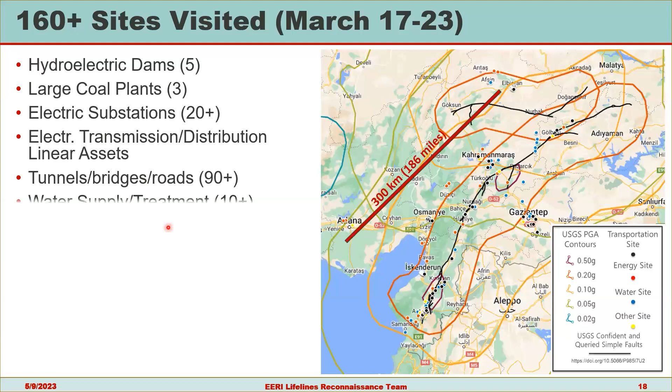We reviewed more than 160 sites, which included hydroelectric dams, coal plants, substations, transmission and distribution assets, tunnels, bridges and roads, water and wastewater treatment plants, airports, universities, LPG terminals, industrial plants, and other gas and energy sites. So a very wide range, a very diversified portfolio, and we're still processing the data. Today, due to lack of time, we're just going to focus on a subset of those. I hope you'll find the rest of the presentation enjoyable.

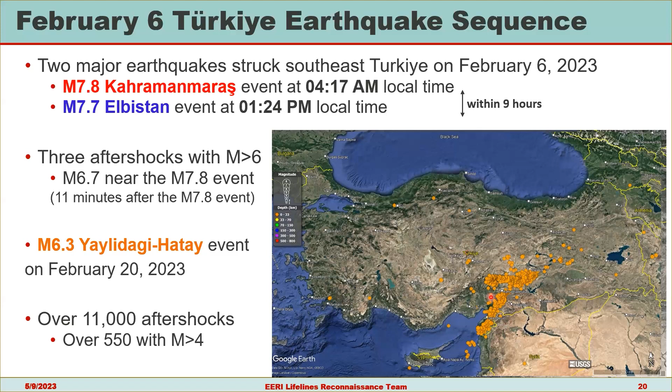As both Ricardo and Eduardo said, there were so many aftershocks that happened over there. It was a very instrumented region. There were over 11,000 aftershocks, and to this day, over 550 of them were greater than magnitude 4.

So just looking at the region, Turkey is a very earthquake-prone region. It is in between all these plates, and the earthquakes we are talking about today, magnitude 7.7 and 7.8, happened at the intersection of the Anatolian Block and the Arabian Plate.

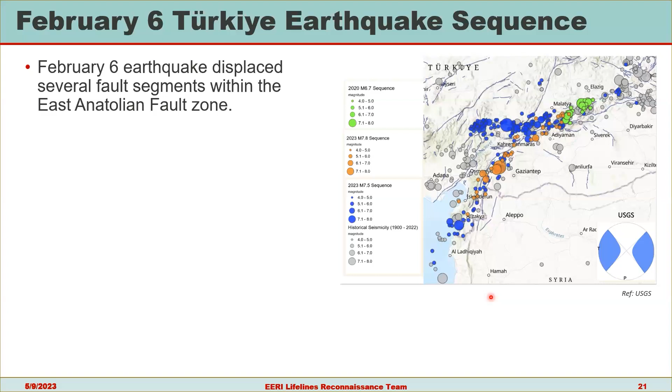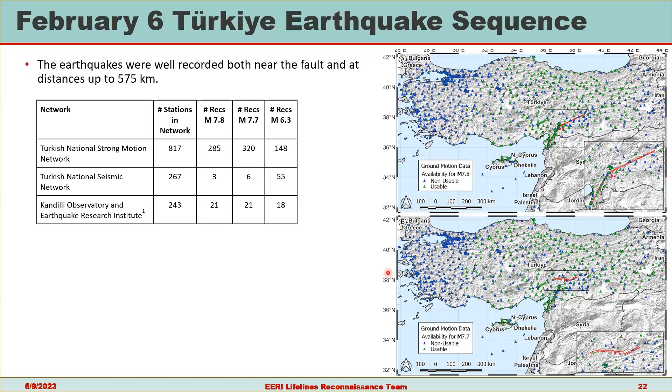I'm going a little fast, just for the time constraints.

If you look at the PGA contours along the area, you can see there were significant directivity issues, with Antakya and Hatay being among the most impacted regions, together with Islahiye and around there.

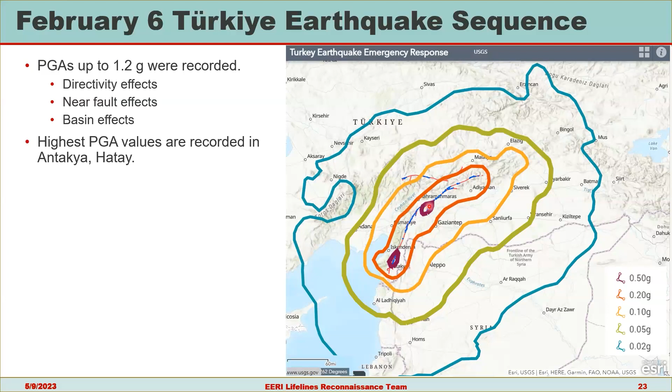So the overall region that was impacted covered 11 provinces in Turkey, corresponding to over 99,000 square kilometers, over 15 million population, over 35,000 buildings collapsing, and maybe over 17,000 buildings requiring immediate demolition.

This was a very sad event, which ended up being over 53,000 people losing their lives. We feel extremely sorry for this and extend our condolences, and hopefully we will learn from these effects. As a result, 2 million people were displaced, and the World Bank estimates the cost at 34.2 billion in physical damages.

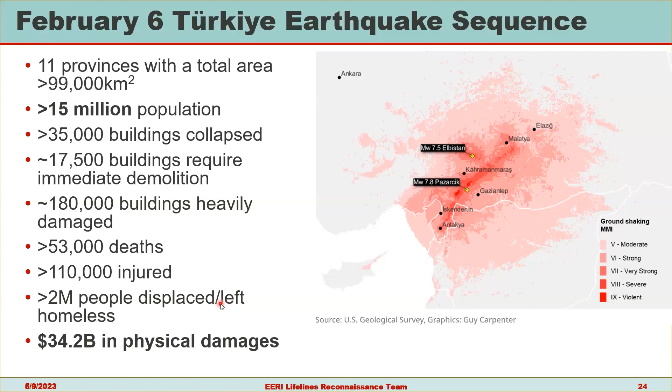The emergency response during the earthquake was a significant issue. Turkey actually has a robust national disaster action plan that was developed in 2014 by AFAD, the Disaster and Emergency Management Authority. Immediately after the earthquake, the level of impact was identified as one needing international support in addition to local and national support.

In fact, a magnitude 7.8, 7.5 earthquake was expected in the region, and a drill was conducted 3 years ago. But the one thing we missed was that it was not expected that all of the area would be impacted significantly from these events.

There was help that came from all around the country, with metropolitan municipalities sending support to the region. But some things went wrong, and I'll cover them quickly in the interest of time before passing it to Brent. There were accessibility problems that hindered transferring support and rescue groups to the impacted parts of Turkey, and necessary equipment was not able to get there, due to damages in the transportation lifelines, which we'll cover some of.

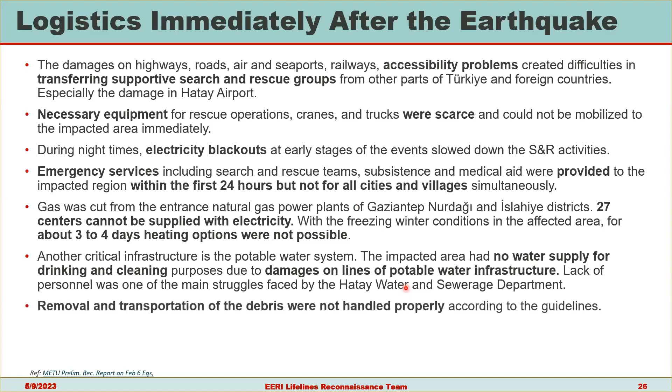With that, I'm going to switch control to Brent to take us through the transportation infrastructure. For the transportation lifelines, we visited a series of bridges and viaducts, which we'll refer to as bridges from this point. We also looked at tunnels, roadways, and airports.

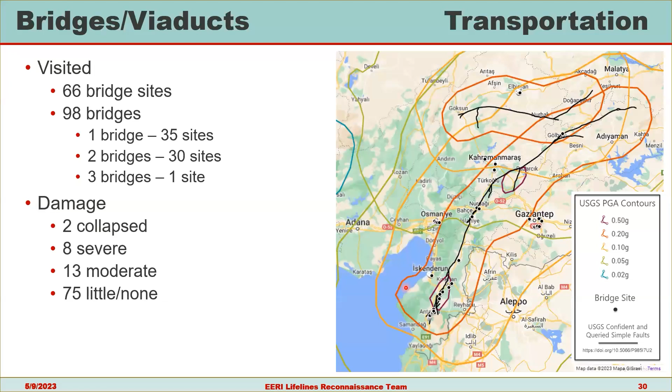In total, we visited 66 different bridge sites, containing 98 bridges total, since some sites had multiple bridges. Of the bridges we looked at, 2 had collapsed, 8 were severely damaged, 13 had moderate levels of damage, and 75 had little to no damage. The locations of those bridges are shown with the black dots on the map on the right.

Common issues with these bridges included incomplete load paths from the bridge deck to the supports at the end of bridge girders. Those incomplete load paths included no end diaphragms between girders at the supports, and undersized or insufficient numbers of shear keys between girders at the supports. We also observed longitudinal movement of some bridges, resulting in walking out or displacement of the thick elastomeric bearing pads at the supports.

We observed a number of geotechnical issues, including abutment settlements, embankment failures, and lateral spreading at abutments, as well as leaning and residual drift of bridge piers and abutments, both in the longitudinal and transverse directions.

To give you some examples of what that looked like, we'll quickly go through a series of 4 different bridges we observed. The first is the Bekir-Karabacak Bridge site, which includes a pair of bridges and is an important river crossing in Antakya. When we visited on March 17th, only one bridge of the pair was open, and it was being used heavily by heavy trucks to take debris from Antakya to a dump site on the eastern side of the city.

At the bottom of the slide, we've included some estimated PGA and PGV values at the site. Those values were provided to us by Jonathan Stewart's research group at UCLA, and they are the RotD50 values. At some point in the future, we will also consider directionality of ground motions at each site.

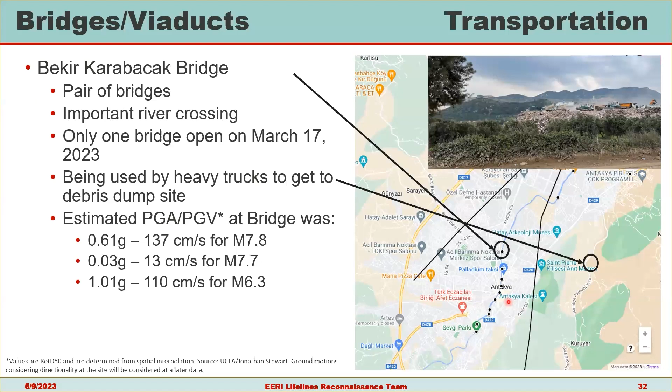Next bridge we want to mention is the Hatay Stadium Bridge. This site also has a pair of bridges. The road serves a hospital immediately adjacent to that area. The bridge itself is immediately adjacent to the fault, and this bridge was closed when we visited on March 18th. Some workers doing activity near the bridge said that the bridge would be demolished.

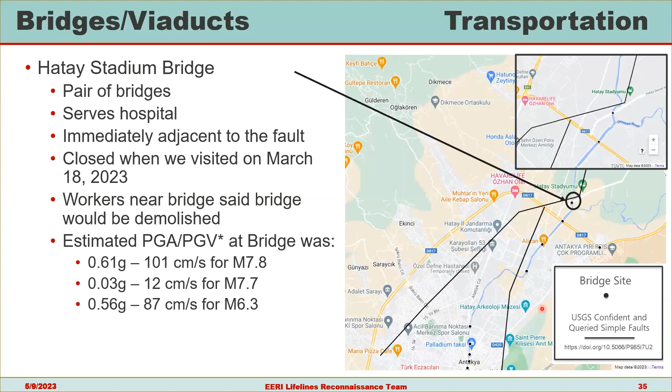You can see the box here trying to show that we do not have the end diaphragm to complete that load path there, and you can see the large longitudinal cracks down the web of the girder.

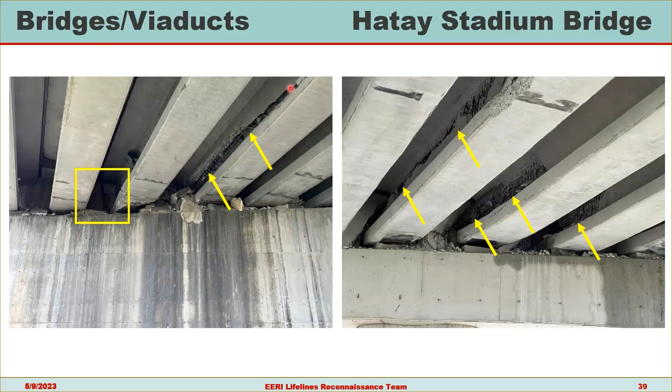Additionally, once again, as we mentioned, the shear keys, both at the ends of the pier caps and even more towards the middle, seem to be undersized or insufficient for the demand placed on them. This particular bridge had so much longitudinal movement that there was significant displacement of the rubber bearing pads, or elastomeric bearing pads, so much so that a number of those pads were ejected from the bridge, and we found them adjacent to the piers of the bridge.

This is an image of the set of piers from that bridge. There's a lot going on here, so we'll try to quickly take you through it. Just some cultural things - this is just north of the city of Antakya, but Antakya is immediately adjacent to an agricultural area, and so just an interesting side note, there were herds of sheep coming through as we were trying to assess the bridge. The piers themselves, there's quite a bit of damage here.

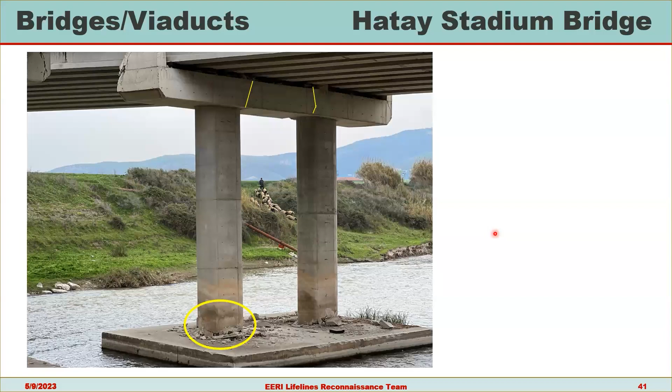Up at the top at the pier cap, there was cracking of that cap. There were plastic hinges at the base of the piers. There's an ejected bearing pad, and the shear keys are damaged both at the ends and at the middle.

The third bridge of the 4 is the Karasu Çayı Bridge. It's a single bridge, near fault, serves a small agricultural area, but the loss of this bridge increases the drive time from each adjacent side by about 30 to 40 minutes. It was open to traffic when we visited.

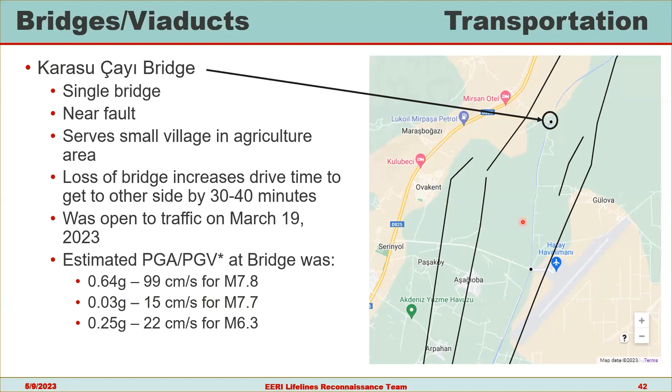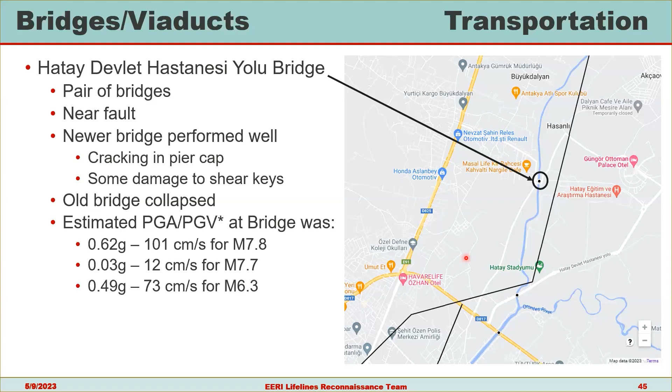This bridge, the Hatay Devlet Bridge, was a pair of bridges, once again, near a fault. What was interesting was that there was a newer bridge on site and an older bridge. The newer bridge performed quite well, with a little cracking in the pier cap and some damage to shear keys, but the old bridge on this site collapsed. This is what that looks like.

I want to talk briefly about tunnels. We had heard before we went to Turkey that tunnels had performed pretty well, with the exception of one that had to be at least partially closed. So we wanted to see that one.

That particular tunnel is the Erkenek tunnel. It's on the D850 highway. It's a 2-bore tunnel, with 2 lanes of traffic per bore, and it connects Malatya, the city in the upper right on the map, with Kahramanmaraş and Gaziantep, the 2 cities on the lower left of the map.

This tunnel is close to, but not on, a fault. We had heard that it was closed, or at least one bore was closed. However, when we were there on March 20th, both bores were open. We did observe that the tunnel liner and casing were both damaged.

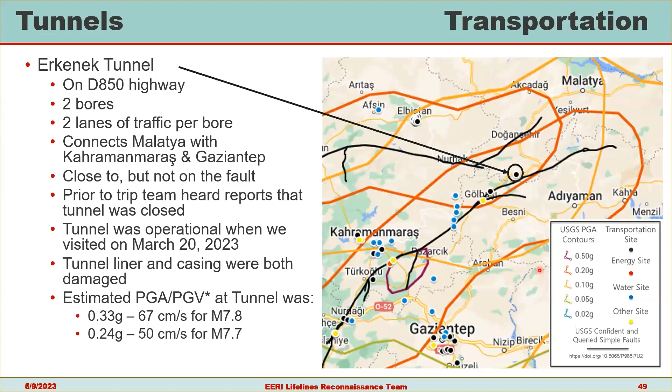For roadways, we primarily observed these while traveling to other sites, and they generally performed quite well. The common issues we saw with roadways were primarily geotechnical, including surface fault rupture, embankment failures, and lateral spreading. But some roads were blocked due to heavy building damage.

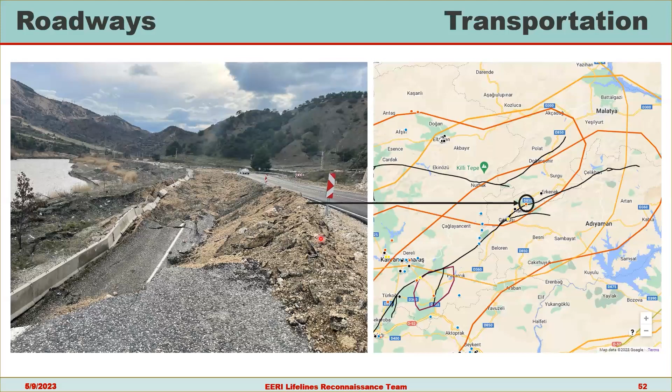This particular one is close to the Erkenek tunnel. It's along the river and had a large embankment failure. They actually repaved the road across the lumpy ground as a temporary measure to get the road back open to traffic, but that road will require significant further repairs in the future.

We visited 2 airports and got reports from a 3rd airport. We visited the Maraş airport and the Antep airport, and got reports from Hatay.

For the Maraş airport, it was constructed in 2019. After the earthquake, it was non-operational for about 2 days, without external power for about 20 days, but operated on backup generators. There was some cracking in finishes and non-structural damage. While we were there, we did observe some slip in some of the bolted connections of the steel structure.

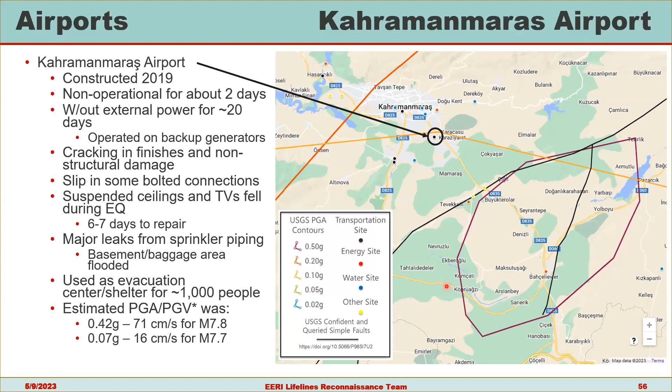We had reports that the suspended ceilings and TVs fell down during the earthquake, which took about 6 or 7 days to repair, and that there were major leaks from burst sprinkler piping, which unfortunately flooded the baggage area in the basement. This particular airport was used as an evacuation center and shelter for about 1,000 people in the days right after the earthquake. Just a couple of images of what that looked like when we were there.

Gaziantep Airport, we visited the new terminal, which was constructed around 2021. It's actually so new that there's still handover ongoing from the construction company to the operator of the airport. We understand that terminal was designed using the most recent Turkish earthquake code.

That airport remained operational. Its baggage handling system was undamaged. We did observe some cracking in finishes and some small non-structural issues. There was a little bit of evidence of movement at expansion joints, but largely no issues there.

Just a few images of what some of that non-structural damage looked like. Some cracking around the perimeter of infill walls. On the right, evidence of a little bit of movement at an expansion joint and around sprinkler heads.

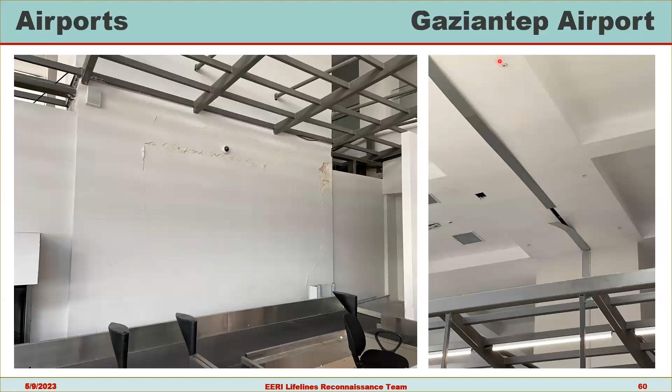The final airport was the Hatay Airport. We did not visit this airport. We had some contacts in Turkey who relayed some information and shared some pictures with us from this airport.

This particular airport, the runway buckled. The airport's immediately adjacent to the fault. The fault really runs through the corner of the airport property.

That runway was quickly repaired. There was no major damage to the terminal building. However, an entrance canopy at the front of the terminal collapsed. This was attributed primarily due to a lack of a lateral structural system in one direction. But unfortunately, some settlement adjacent to the terminal impacted some of the mechanical, electrical, and plumbing infrastructure.

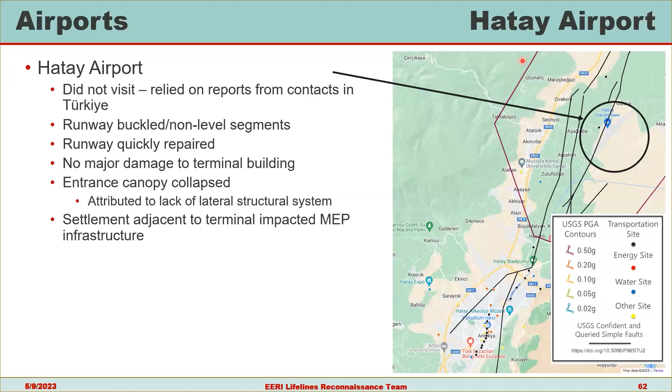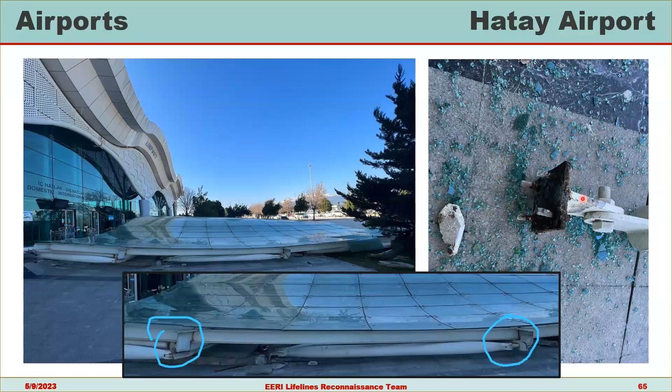I want to briefly touch on the universities and what we did there. We visited 3 different universities: Kahramanmaraş Sütçü Imam University, or KSU, Gaziantep University, and Mustafa Kemal University in Antakya.

The KSU campus, pardon me, go back one. Not able to control. Okay, there we go.

So the KSU campus was operational after the earthquake. The entire university campus had been converted to emergency housing and shelter when we were visiting in March.

In particular, we visited the engineering buildings, which had been constructed around 2008 to 2010. These particular buildings performed quite well, and there was very little cracking, even of finishes, in those buildings. We also visited the physical plant and observed no damage there, even to unanchored equipment.

I visited a hospital and clinic associated with that university. We did observe some limited damage at that hospital, including cracking at the interface of infill walls and structure, some tile damage near expansion joints, some cracked glazing and automatic doors, and failure of a small roof structure. For the sake of time, we're not going to show those photos.

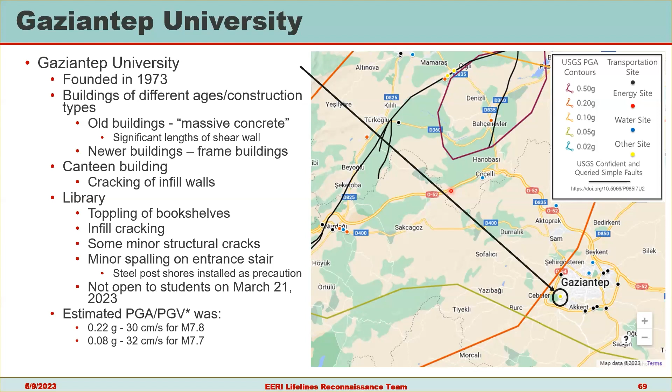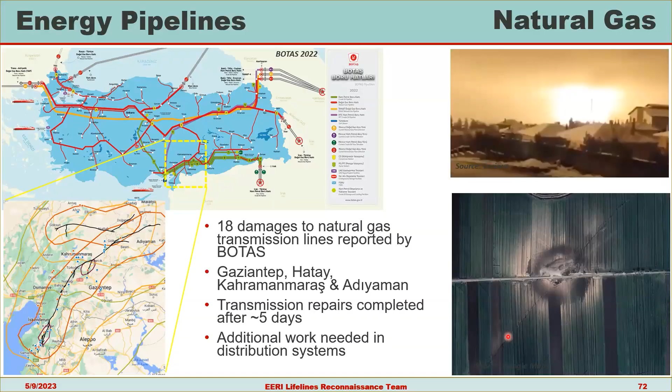We weren't able to work with or contact, despite trying, government officials on these, but I think there's a lot of really important things to understand about successes and also failures of some of the various gas infrastructure, and lessons we can learn from around the world, as I think many of these systems are really relevant to the rest of us in earthquake-prone areas. We hope to learn more as we continue forward and more information becomes available.

I'll kick off the water section a bit by talking about the first two water utilities, and then pass it off to Solchek and Robert. The Kahramanmaraş Water and Sewerage Administration is the namesake of the earthquake and manages the northern area. It was incorporated in 2016 and serves about 1.2 million people.

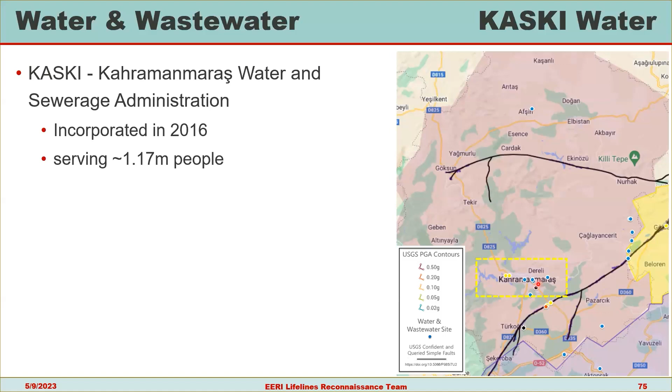Relatively recently, a number of these province-level water utilities were developed to bring all these different towns under one common management group. That has helped in some ways in us being able to get information from these areas, but it's also provided different types of challenges, since systems within one of these groups can be very different from town to town or city to city based on how they've developed over time. So there's a lot of variety in the characteristics of each of the systems.

Going north, the two large water sources are relatively recent, which we saw as a trend in construction of infrastructure systems over the last 20 years in Turkey, built to support increasing populations and help fuel economic growth. A lot of the systems built recently performed generally well, and I think are really good surrogates for other places around the world.

A couple of additional details about the Kaski water system: about 3,200 kilometers of water distribution pipeline, 1,500 in wastewater, a number of different pipeline types that are relatively similar to what we'd have in cities in the US and around the world. And the new installations are also similar in the types of materials that we would expect used in a lot of other places.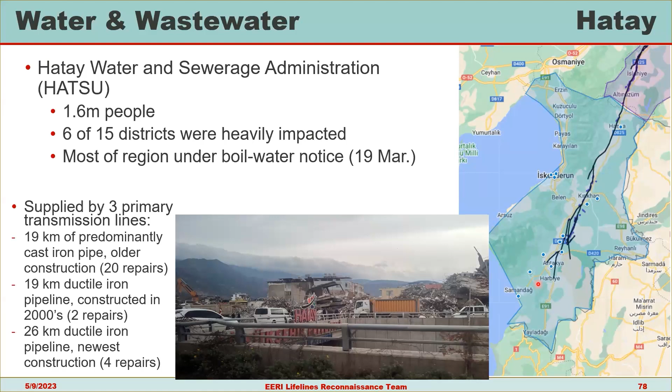There's a number of repairs that were done relatively rapidly following the event to get primary supply to a number of areas, and there's additional information on some of those there.

The town of Iskenderun is a little bit further from the fault rupture, but experienced some pretty significant liquefaction effects.

Whether it was inoperable due to acute damages in this area, or if it's more related to some of the wastewater treatment plant damages, which Robert's going to talk about in a little bit, that was unknown to us at the time. But these are some important observations as we continue identifying which pieces of the infrastructure systems are leading to their inability to get things back up and running.

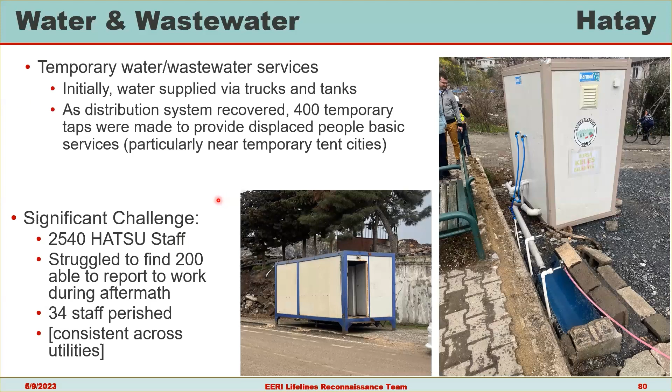The significant challenge reported to us by all of the utilities was staffing. For example, Hatsu had about 2,500 staff. In the days after the earthquake, they couldn't find 200 people to come. 34 of their staff had perished. Many people were looking for lost loved ones and keeping an eye on their property. Those are some of the really big personnel challenges that impacted the recovery and the ability of folks to move forward after this.

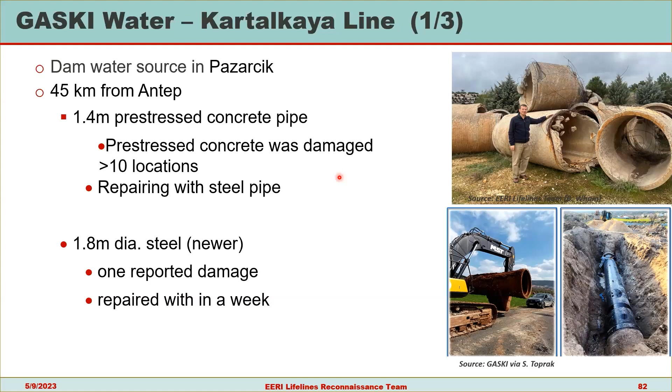But right after the earthquake, some people migrated away from the city, and there were also damages in the distribution lines, so the need for water was limited at that time. So Gaziantep Gaski were able to provide water to part of the city from the other sources. In this transmission pipeline, there were wall damages at 10 locations, structural damages, and fault ruptures, which I'm going to show in a moment. The pipeline goes into the mountain for about 3.5 kilometers. The diameter of the tunnel is about 5.6 meters, and the pipeline itself is 2.6 meters.

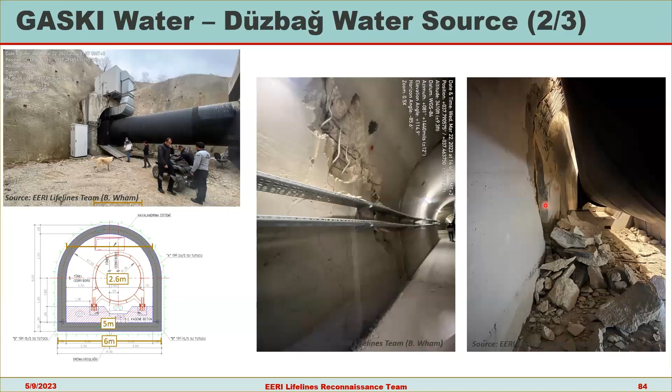You can see some of the damage here in the lining. We walked through the entire tunnel, 3.5 kilometers from one end to the other, and there were many lining damages throughout, some relatively heavier compared to other locations. At those locations we also noticed significant displacement in the tunnel.

As a result of those movements, you can see there were some residual offsets at the pipeline supports here, and there were some fixed support damages.

The pipeline was actually constructed quite well in many aspects. They have expansion joints with a capacity of 7 centimeters, and it was able to tolerate the movement itself — we haven't noticed a separation at any location. Eventually they started a repair shop, inserted a 30 centimeter pipe, and were able to push both sides back to their original location.

There was an unfortunate location here. You can see this is a gas pipeline about 1 meter in diameter, and this water pipeline, the GASKI-Düzbağ transmission pipeline, is crossing here. Because of requirements by the gas company, they were asked to cross that area almost perpendicular to the gas pipeline, so it's about 80 degrees here where they crossed.

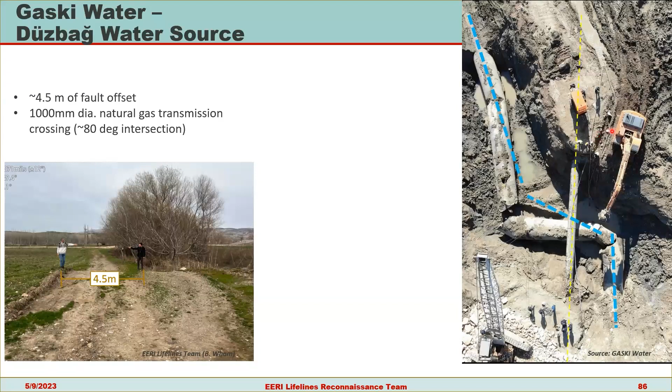You see here the outline, so this is the pipe. Right along this line we have the fault rupture, which is about 4.5 meters, especially in that area where we have a bend in the pipeline system. You see the extent of the damage — enormous energy was released here.

There were bends in the pipeline and wrinkles here, and you notice breaks and thinning in front of the pipelines. They were just stored them; maybe in the future they will use them for exhibition purposes.

The third main source is the Mizmilli water source. Here, as I mentioned previously, they were using wells to provide water, and they are 120 meters deep. There were 4 pump stations used here to pump water to the storage facility, and then the water is fed into the city by gravity. There are 42 kilometers of pipeline here, a 1.2 meter diameter steel pipeline.

You can see the structure before the damage here, and the pumps themselves — this is the pre-event building. After the earthquake, the pumps were fine; there was no damage to them and they were functioning well. But the structure itself got damaged.

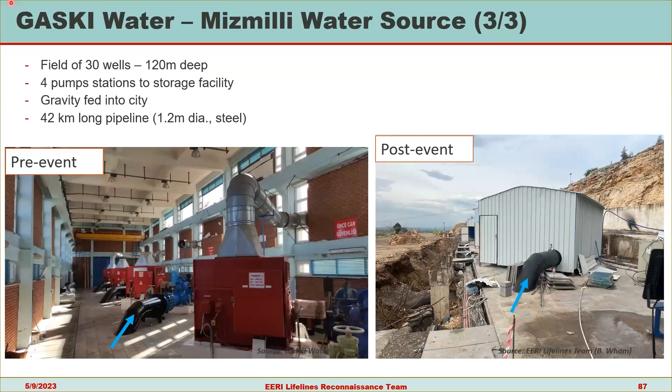Typical forms of damage — the construction was all quite similar, with inclined reinforced concrete columns and 4 to 5 ring beams along their height. The beams were quite stout, so most of the damage was concentrated at the columns. We did see some beam-column joint failures; in this instance, you see no confinement visible within the joint.

Another common issue was hinging just above beams, particularly up in the upper elevations of the tower where the plan dimensions narrow. You see here smooth reinforcing bars and a lap splice right within the hinge region—a fairly common form of damage.

This is potentially a newer tower in the Hatay region. Again, hinging just above the beam at some of the upper elevations. This is deformed, mechanically deformed reinforcing, with damage focused at the columns, which are slightly outboard of these very stout ring beams.

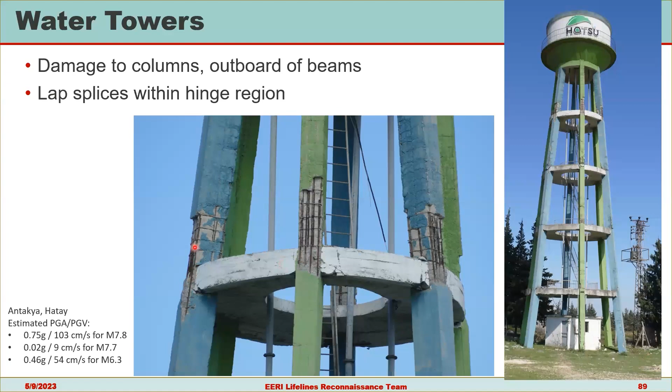In the Marash region, one of our teams had the opportunity to speak to the operators of the system. Similar forms of damage and similar construction of the tower, but because of the damage, they actually rerouted the system around this tower. Subsequently, customers reported fluctuations in pressure or even no pressure, presumably at higher peak demand times. Again, these are points of concern for adjacent communities given their height and fragility, as we saw.

Getting into water and wastewater treatment facilities, grouping these together, there are a lot of similarities in the hydraulic structures, and we had very good access throughout mostly the Hatay region. We visited 9 wastewater treatment plants, and had a good interview with Hatsu, one of the operators of that facility or network, which has 16 wastewater treatment plants in total for their system.

As an overview, they had 10 plants operational about 40 days past the earthquake, during our visit. 5 were still inoperable, and we'll focus on some of the reasons why. 1 was reported as destroyed, largely due to ground subsidence—they reported almost a meter, about 90 centimeters of subsidence at that facility.

3 water treatment plants were visited, and we'll discuss one of those. Generally, as a class, we'd describe their performance as damaged but still operational. Brad touched on some of those challenges.

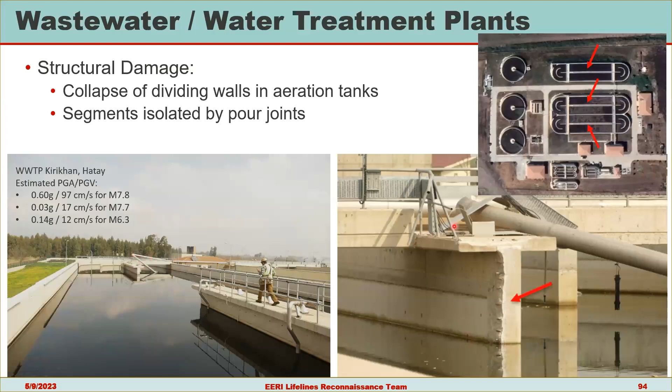Looking at a slightly different configuration, with a similar shape and dividing wall, this time there are opposing walkways at one side only, at opposite ends of the wall. The damage was really a pull-out of these walkways from the wall progressively, and as they became compression-only elements, this promoted a torsional response that damaged the dividing wall as it collapsed. You can see it partially collapsed here on the left photo.

Geotechnical aspects were a considerable factor, especially at the wastewater treatment plants. These tended to be situated for gravity flow at the low points or the middle of this large alluvial valley, often pretty close to the fault. We saw seismically induced settlements up to 25 centimeters. Generally, tank structures and hydraulic structures did reasonably well in terms of settlement, but even here, two closely spaced tanks had free field settlements measured at about 16 centimeters between them. So the demands on interconnecting below-ground piping and other infrastructure were considerable and led to some damage.

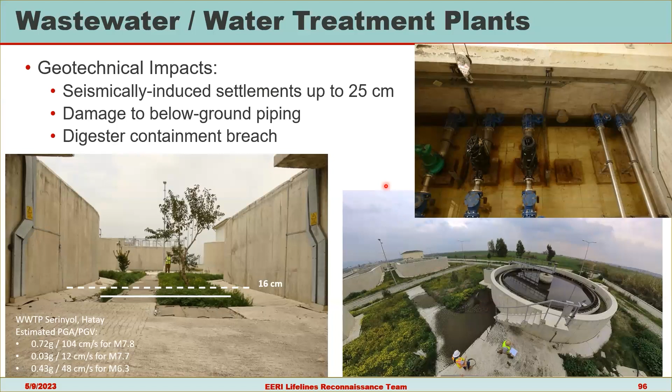In the upper right here, you see a basement pump area sitting in about 30 centimeters of water that's infiltrated. The operators believe that was from a number of below-ground pipe breaks that hadn't yet been investigated. Here, I believe this is a digester structure, but you see a containment breach, whether in the piping or in the structure itself, unclear. Again, meaningful impacts from pretty large settlement there.

Non-structural damage, again, this is one we see in many earthquakes, and I think many people probably anticipated it. Control panels, cabinets, equipment - we saw many things either unanchored or with anchorage that failed quite quickly. Often these were just righted post-earthquake and put back into position.

We'll focus on some of the larger components that really impacted post-earthquake operation. In this photo, you see a larger generator displaced in the east-west direction, in the photo background, about 30 centimeters. So you see several good things going for this generator, right? It had an integral fuel tank in its base. The electrical connection was fairly flexible. The exhaust connection to the building was also fairly flexible.

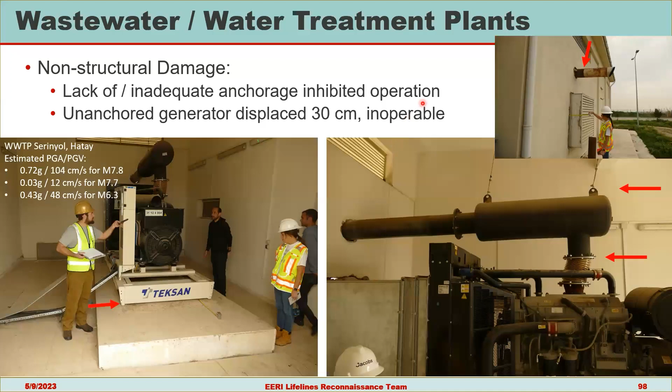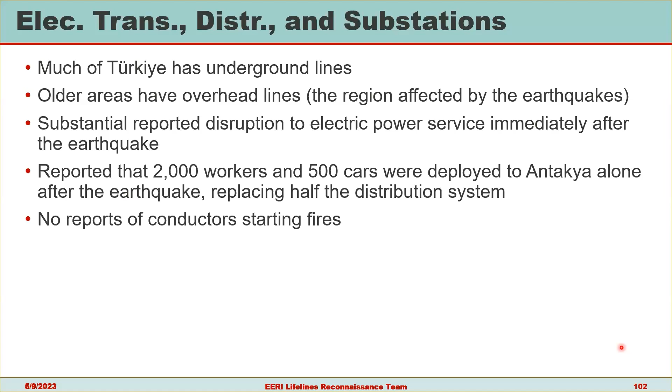Overall performance, transmission and distribution overhead structures generally performed well, but there were some exceptions. These were when there were geotechnical conditions that led to damage, if there were adjacent failures that impacted overhead structures, or in many cases, there were insufficient pole anchorage into the ground.

Outdoor substations would experience equipment damage, but this was relatively minor. Substation buildings, on the other hand, experienced both equipment damage and the collapse of the buildings, and these were substantially impacted by adjacent structural failures.

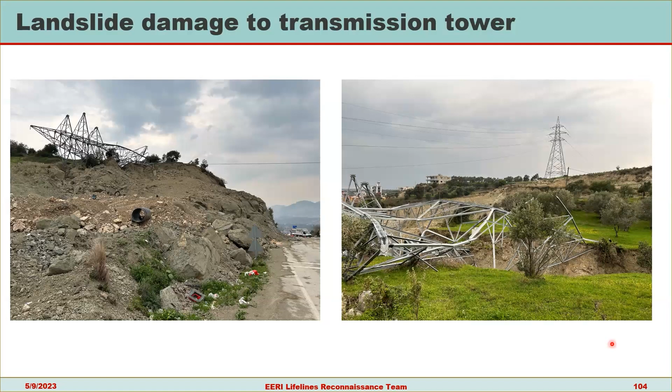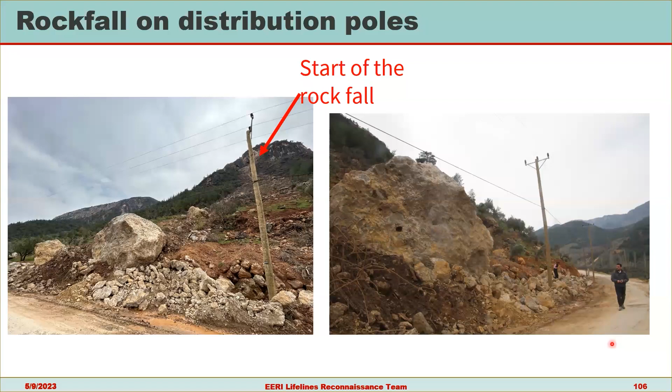This was not the only instance of geotechnical impacts. We also saw some instances of rock falls. In this case, the rock started all the way at the top of that hill and rolled all the way down and took out a number of distribution concrete poles that were then replaced by wood poles. This rock slide also blocked the road, so they weren't able to bring in cars to access it. They actually had to come in by helicopter to replace the poles.

You can see what one of those concrete poles looks like on the left-hand side when it's hit by these rocks coming from above. This wasn't just a local impact on one or two poles. This was all along this road there were impacts. On the right-hand side, we can see pole after pole, wood replacement poles that are in place.

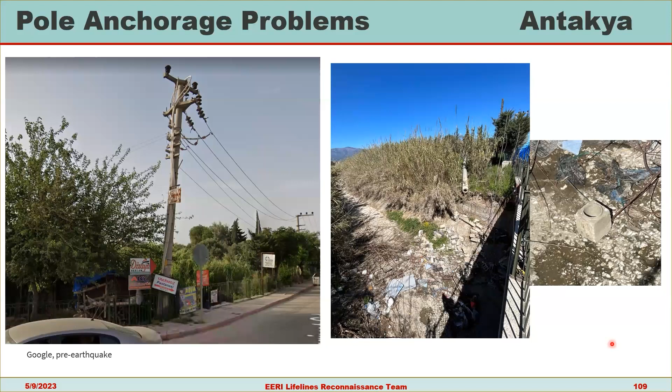Here's some more examples of rotating poles on the right-hand side. We see the after version of what's shown on the left-hand side, where I think this one got tugged by the conductor as well, and the pole fell off, and you can see what one of those pole foundations looked like in the photo on the far right. It just fell off the cliff here, right next to a bridge. If we look out in the field, away from the more densely populated areas, we see a number of poles and lines leaning from these similar types of pole anchorage problems.

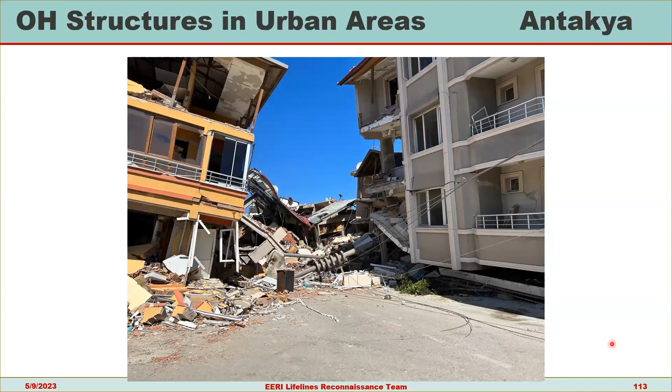In addition to debris hitting the structures, it could also land on the conductors, and then the conductors would pull on top of the poles and deform the pole. So this pole is leaning maybe 10 or 15 degrees because debris hit the conductors.

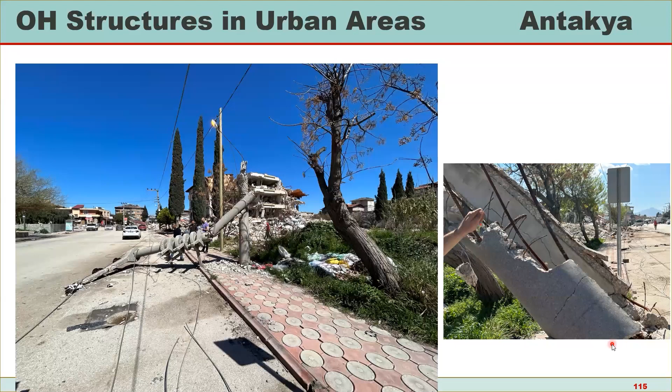In some cases, there were failures of concrete poles which may purely be attributed to inertial force issues. This typically occurred when there was some sort of deficiency. In this case, there were relatively smooth bars and very small stirrups that were lightly corroded, but because the stirrups are so small, they wouldn't spall enough concrete that you could notice there was a problem, and the stirrups fractured quite easily during the earthquake.

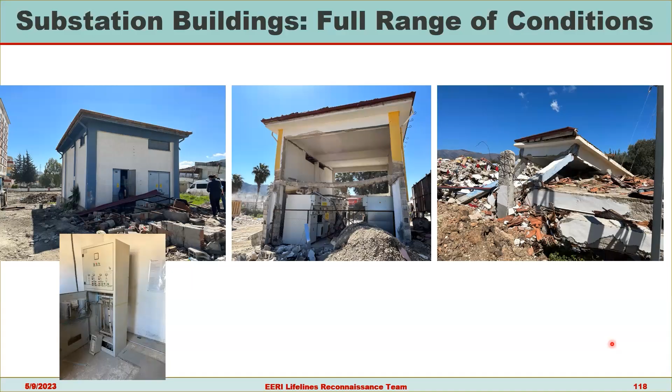These substations have a variety of equipment in them with varying performance depending on whether they were hit by infill or not. Here's an interesting example where the substation building was fairly heavily damaged, but the equipment inside was completely fine. Then, by contrast, on the right-hand side in Adana, one that has been wiped out.

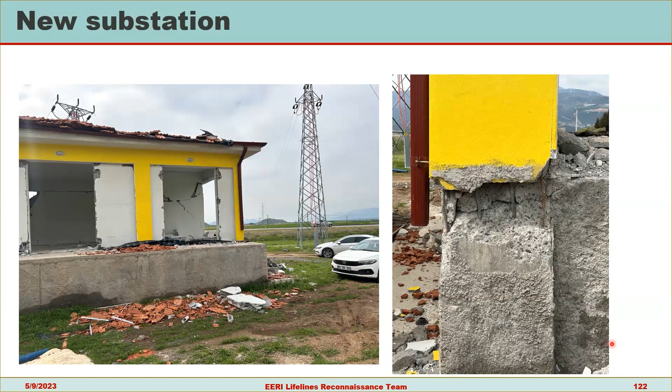Looking at where the damage occurs, it's right at a stiffness discontinuity, and it's unclear how much confinement is being provided via the stirrups here—certainly don't see any. The old substation, on the other hand, we took a peek inside, and the equipment is looking pretty good.

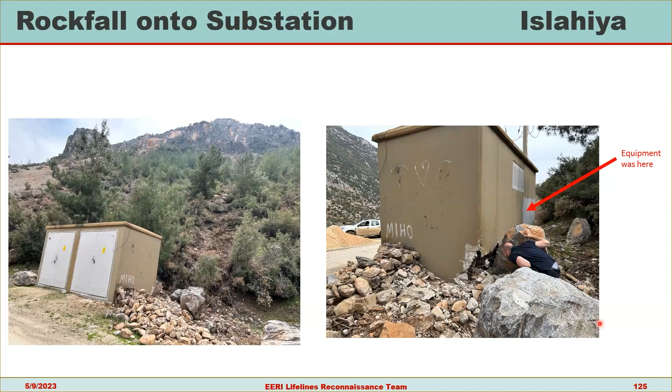Substations were also impacted by the rockfall. This is down the road from where the concrete poles were taken out. This substation was hit by some large rocks, but fortunately, where the rocks made impact in the building, it was the opposite corner from where the equipment was, because that equipment was actually okay.

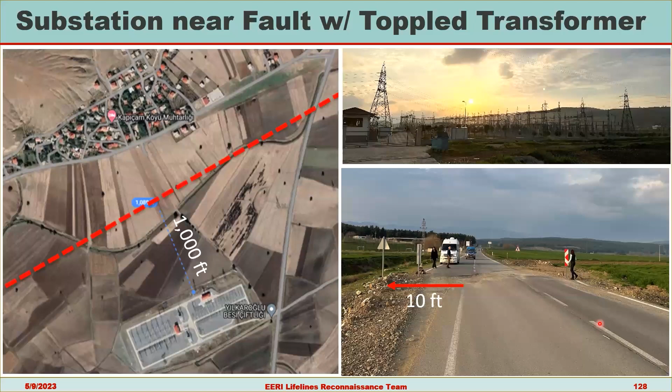So overall, I think the picture is that overhead structures are not particularly vulnerable to inertial forces, something we've known in the community, but they can be highly vulnerable to geotechnical conditions if present, and quite vulnerable to conditions around them—their environment. So buildings collapsing on them, or on a conductor that then pulls on the overhead structure. The equipment in overhead structures and substations can also be vulnerable to anchorage failures. In the substation buildings themselves, if they lack proper detailing of joints and have infill walls in intense shaking, that can spall and damage equipment.

So with that—actually, I'm not going to pass it yet. I'm just going to briefly touch on industrial facilities, as a bit of a teaser for reading our full report, because we only have a slide or so on this.

Industrial facilities often aren't considered part of lifelines. I normally wouldn't think of them as such, but I think a lot of them are. One example is silos. Silos contain a lot of grain, which is quite important in an agricultural region—if you can't feed your livestock, there's a huge problem for a lot of people living in the area.

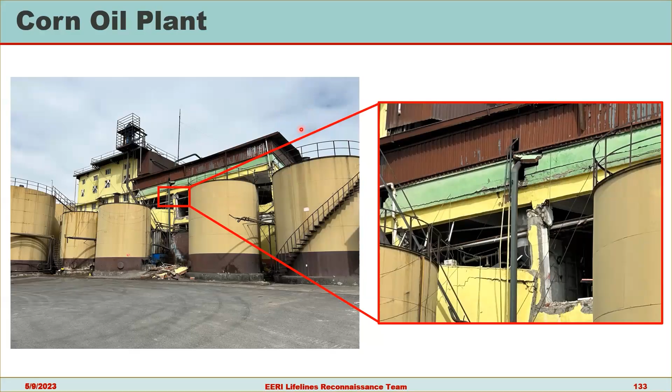Let's examine the observations for these dams in detail. The first is Alabalık Hydroelectric Dam, a river dam with a power of 5 megawatt, located very close to the fault, as you can see on the map. In this dam, slope stability issues upstream, cracking in some concrete structures, and nearby landslides have been observed.

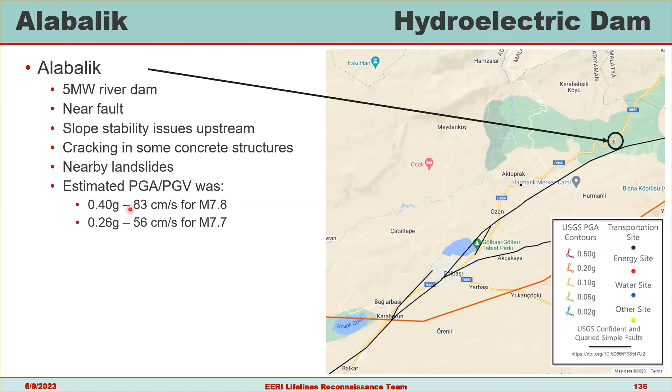Estimated PGA values for the location of this dam for a 7.8 magnitude earthquake is 0.4 G, and for a 7.7 magnitude earthquake is 0.26 G.

Menzelet Hydroelectric Dam is a clay core dam with a power of 124 megawatts. Its construction finished in 1992. This dam performed very well. Only some rockfall occurred, causing a roadblock. Oil leaks in two transformers have been observed in this dam, but it is not known whether it happened before or after the earthquake. Estimated PGA value for this dam's location for a 7.8 magnitude earthquake is 0.18 G, and for a 7.7 magnitude earthquake is 0.12 G.

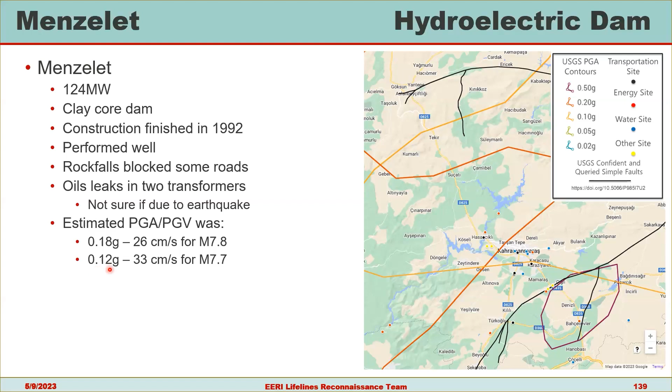Kılavuzlu Dam is a clay core dam like Menzelet, with a power of 54 megawatts. Its construction finished in 2012. This dam is used for irrigation and electricity. This dam also performed quite well, like Menzelet Dam. There is no equipment damage, only minor lateral spreading at the crest of the dam. Almost 300 local people went to the dam after the earthquake because they thought it was a safe area. Estimated PGA value for this dam's location for a 7.8 magnitude earthquake is 0.18 G, and for a 7.7 magnitude earthquake is 0.11 G.

Berke Dam is a concrete arch dam with a power of 510 megawatts. Its construction finished in 1999. In this dam, the EERI team observed minor vertical tilting of the concrete arch. Estimated PGA value for this dam's location for a 7.8 magnitude earthquake is 0.14 G, and for a 7.7 magnitude earthquake is 0.06 G.

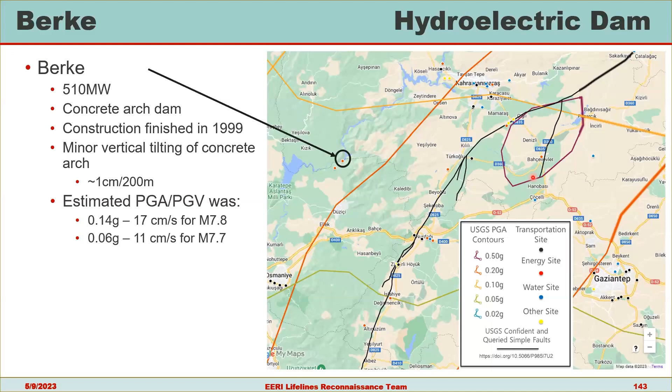Last one is the Karaçay hydroelectric dam. Karaçay dam has a power output of 65 megawatts. Its construction finished in 1999. This dam stores 35 million cubic meters of drinking water. In this dam, there is no damage, only the accessing road had rockfalls and slope failures. Estimated PGA values for this dam's location for a 7.8 magnitude earthquake is 0.31 G, for a 7.7 magnitude earthquake is 0.01 G, and for the 6.3 magnitude earthquake is 0.46 G.

Thank you, that's all for the dams.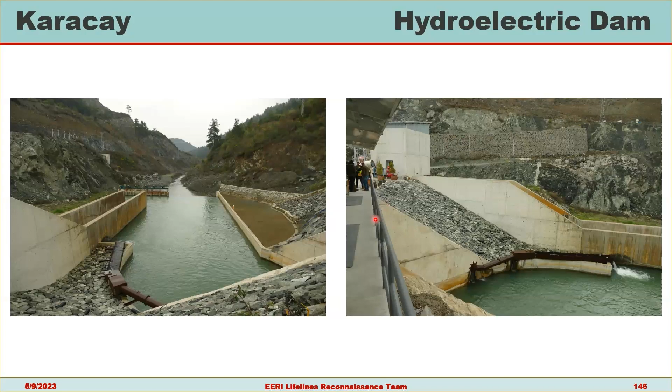Thank you, Myra. Okay, so I will be talking about coal and gas plants, starting with coal and gas plants and continuing with other facilities.

For the coal and gas plants, in the region there are 8 plants which are fueled either by coal or gas. We managed to visit 3 of them, as the permissions were quite hard to get for these facilities. All these 3 large coal plants were heavily affected.

They have 10 units in total. Afsin plants A and B have 4 and 4 exact similar units, and Iskenderun coal plant has 2 units. They have a combined capacity of 3,900 megawatts.

They started operations in the 1980s, and the facilities have been growing up until 2019. These plants do not have black start capabilities, which means that they cannot restart their operations until a full evaluation and inspection is carried out to get them clear for operation again.

All the units that were online during the events were tripped due to turbine vibrations, and they are heavily damaged compared to the ones that were offline.

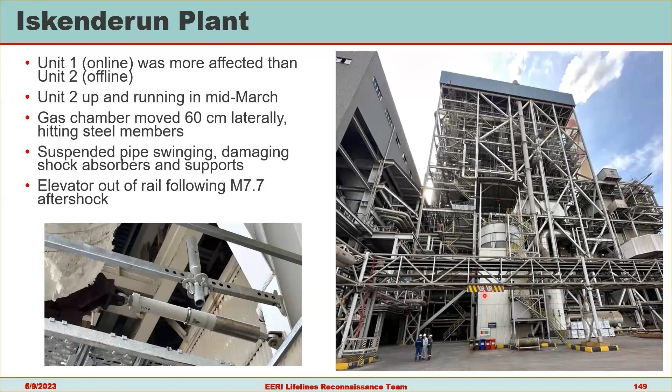A couple of things that happened in this plant: a gas chamber moved 60 centimeters laterally and hit steel members, damaging them. There were some swinging pipes, and shock absorbers and supports were damaged as well. One elevator was out of rail following the 7.7 earthquake aftershock.

Transformers are not generally well attached to the ground or to the rails they were put on. Some of them broke loose, and another transformer moved 10 centimeters laterally, as you can see here, but they were all operable. Some glass reinforced seawater circulation pipes with joint displacements exceeding their design tolerances were observed, causing minor leaks on the system, but again this was not a big deal for the operation.

The PC control cabinet with circuit breakers caught on fire, and they had to replace it. That was one of the major events that happened here. Falling ceiling tiles we have seen in nearly all of the plants, in the control room and on top of the control board and the operators, but generally these did not cause major damage to the system equipment.

In this plant, there's 2 to 4 centimeter settlement around the turbine building, but the important structures were on 80 centimeter diameter deep soil mixing columns extending up to 45 meters vertically.

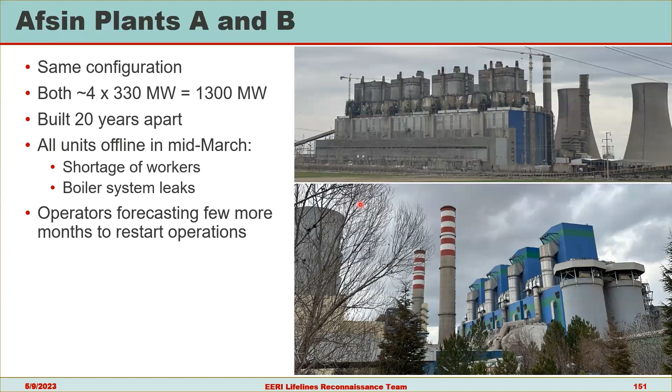Afsin plants A and B have the same exact configuration. Both have 4 units with 330 megawatts capacity. They were built 20 years apart. All units were offline in mid-March, and they are not planning to start them in the next couple of months either. There's a shortage of workers since the area was affected by the earthquake, and the workers had their families move out of town, so it's a very major problem for the plants. The boiler system leaks also caused a tremendous amount of problems with the restarting abilities of these plants.

A couple of other things: we observed 15 centimeter vertical settlement at the ground floor of the powerhouse, as you can see in this image, but none of the electrical or mechanical components installed on or near the surface appear to be damaged. One major thing was one elevator was crushed by its own balancing concrete block.

We observed minor vertical cracks on the base columns of the concrete cooling tower, and in the boiler building there was evidence of pipes banging against adjacent steel frames. Plant B operator reported most of the damage was observed at elevations above 40 meters from the ground, mostly in the cooling towers.

They have a lot of steel equipment, with minor and major damages at these levels, going up to 80 meters. So they need expert inspectors to go over these facilities before they can be operational again.

The parts related to the transmission systems: half a dozen tall insulators broke their ceramic parts or their connections. One step-up transformer suffered a couple of bushing breaks, and another large one had a 15 centimeter pipe connection that failed, and oil leaked from this part. But there were no fires reported for this transformer, and they changed the gasket and it's operational again.

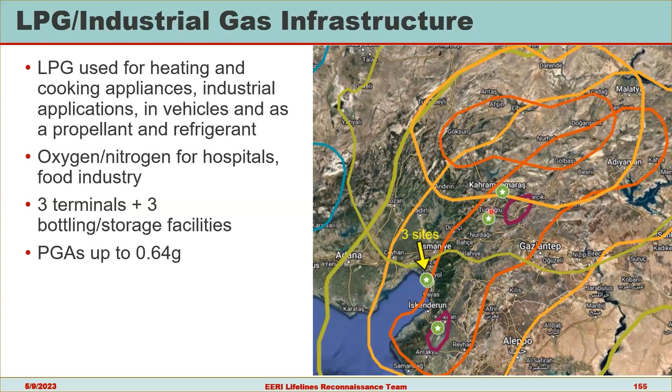Let's continue with the LPG terminals. These are 3 terminals right next to each other. They have 20 large circular gas storage tanks and spheres built starting from the 1980s. Several buckled steel braces supporting these tanks were observed; these were designed only for tension. They also observed minor leaks at flanges, which were quickly resolved.

One fluid fuel tank with a floating roof spilled 6.5 tons of fuel, but did not catch fire, no ignition. It was rainy conditions, so they were lucky in that regard.

One thing that happened here, as you can see on the coast, is a 10 kilometer plus lateral spread site. What happened is right after the sphere tanks are located next to the main crack, it slid 50 centimeters, and this slide caused major cracks on the boundary walls, but it did not affect the spherical tanks much.

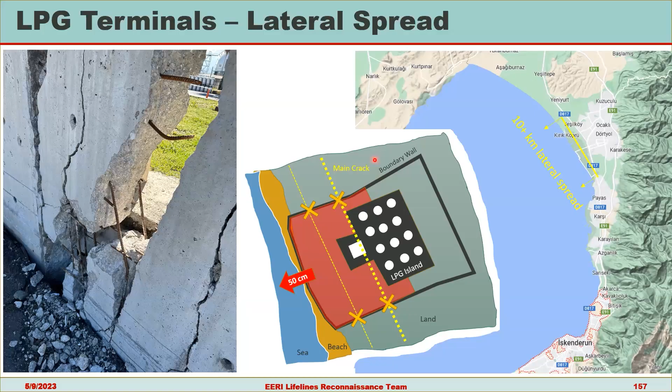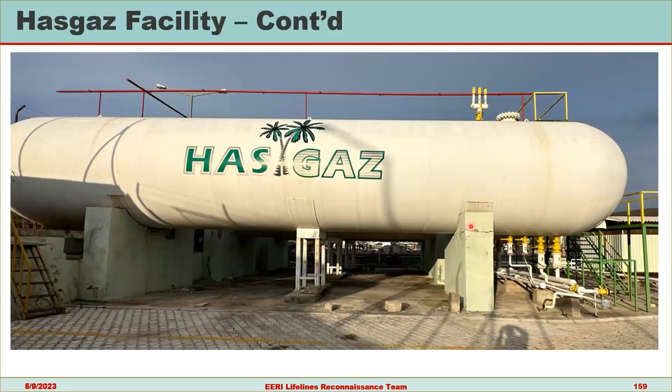We were able to go to Kahramanmaraş to visit some industrial gas storage and production facilities as well. One of the main sites is one that is serving hospitals and food production facilities. They are serving oxygen and nitrogen.

The same company had the gas production facility a little bit further away. It's one out of 4 pressurized oxygen production facilities in Turkey. This was built in 2017 to withstand high seismic loads, higher than the code requirements. The owner requested this, and it increased the overall construction costs by 30%, but this was the only site which was operable after the major earthquake out of 20 in the industrial park where it was located.

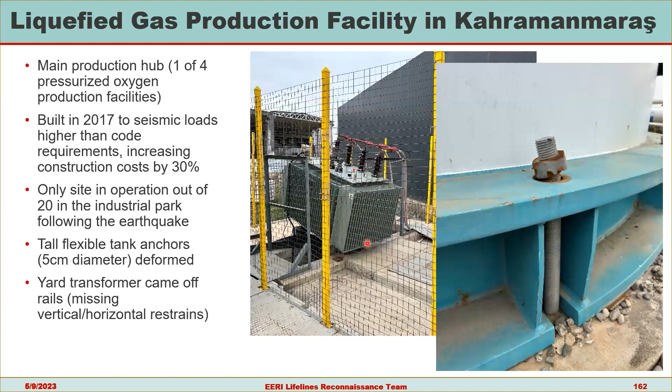About petrol stations in Antakya, we were not able to investigate them in detail, but the pump stations with canopy structure and adjacent one-story accessory buildings are very, very common. The vast majority appear operational and relatively undamaged, but the one-story buildings were somehow much more damaged than the canopy structure itself.

I'm going to finish with the wind turbines. We were not able to visit any of the wind turbines up close, but from our visits within other sites we were able to take pictures. We haven't seen any observable damage. We also asked locals about this wind infrastructure, and they reported that it was not significantly affected. But we haven't seen any other reports, so it has to be investigated in detail as well.

So I'm going to pass over to Ricardo for the closure.

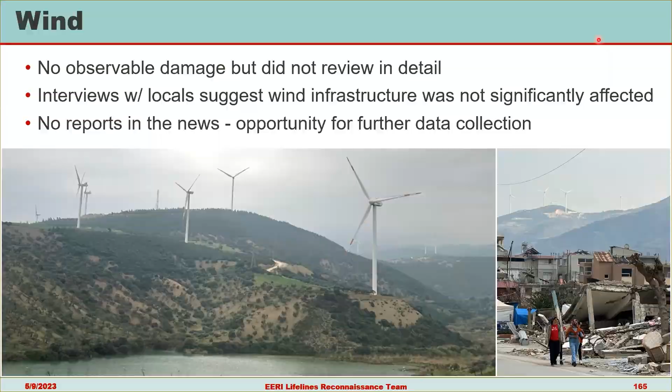All right, so in conclusion, I want to emphasize everything we presented today is preliminary and is limited to the sites we visited. But overall, the first impression we had by traveling through this region is that the lifelines performed relatively well, if you consider the unique earthquake sequence.

For example, the hydroelectric dams were operable once they got power back from the grid. The grid itself performed very well. They were up and running within a week.

The LPG terminals had no major disruptions. Most of the airports' buildings performed well. In some cases, operations were halted by damage to runways or equipment, but nonetheless it was resolved within a week. The university campus structures that we visited had limited damage, and some of those structures functioned as shelter areas in the days after the earthquake.

And one of the 2 units in the large coal plant in Iskenderun Bay was up and running 6 weeks after the earthquake.

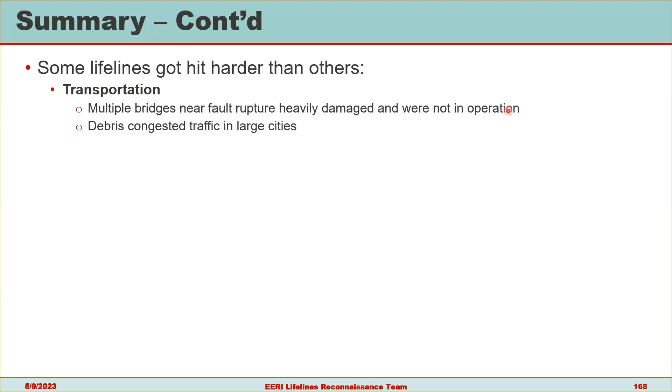Nonetheless, I want to emphasize that some lifelines got hit harder than others. So we talked about transportation - multiple bridges near the fault rupture got heavily damaged. And you have heard of the large amount of debris that congested the traffic in large cities in the days after the earthquake.

The water and wastewater system was probably the most affected of all. Several treatment plants were still inoperable in the days when we visited, in mid-March, and water and wastewater was still delivered below code requirements in terms of chemical composition 6 weeks after the earthquake.

The energy system performed well, but nonetheless there were 2 large coal plants in Elbistan that were still offline in mid-March, mainly due to a shortage of skilled workers and issues with the supply chain to get replacement parts. And Ezra talked about the many collapses affecting the substations.

The few industrial facilities that we visited performed well, especially if they were on deep soil mixing columns or piles. This was consistent throughout the region. We did see some precast structures that collapsed, and this was, again, not the focus of our trip, and I'm sure we're going to get additional insights from the building team presenting in 2 weeks.

Hospitals are typically considered lifelines, but there was a separate EERI team focusing on those, so we did not review those in detail. Stay tuned for the hospital team webinar next Tuesday.

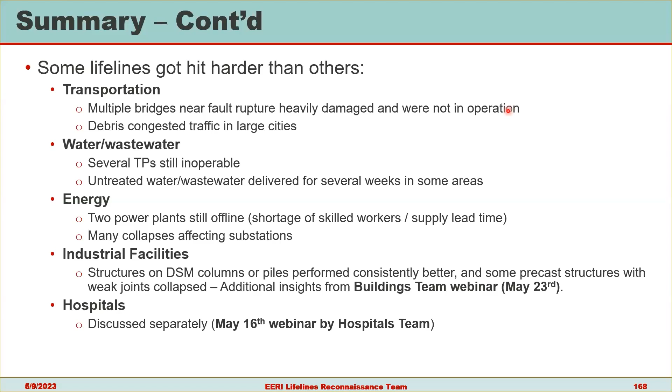After this comprehensive presentation, the question is what can we do next as a community? So we put together a couple of slides to throw out some ideas on what to do next, including recommendations for future studies and further data collection.

I'm going to start with mentioning the lifeline system that we did not cover, especially natural gas transmission and distribution facilities. We knew there were reports of damage. We tried a couple of leads in the field in March and were not successful, so there is a gap there, and perhaps someone could take the lead in reviewing those.

The wind system did not appear to be heavily damaged, but nonetheless I haven't heard anyone taking a closer look, so perhaps someone can explore that system. We did not look at solar and telecom.

It would be interesting to keep documenting the performance of facilities that were still recovering at the time of our visit, in particular the power plants in Elbistan and the inoperable treatment plants—documenting the damage and the restarting of operations after coming back online.

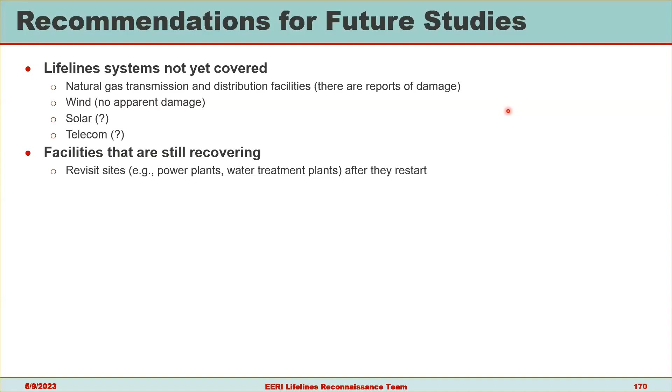I think one of the main topics of interest coming out of this earthquake, besides the many building collapses around the region, is what I call seismic interaction—structures falling on structures, structures falling on equipment, equipment on equipment, rockfall on structures. There's a wide range and large number of those, and I think the community could benefit from taking a closer look.

So throwing a couple of ideas out in this slide: it would be interesting to review the equipment classes that are most vulnerable to high frequency impact loads.

It would be interesting to document typical structure-to-structure interaction damage, such as pounding or collapse footprint, to inform future cordoning activities. This goes back to the idea: if you have an earthquake in San Francisco and a skyscraper collapses, how much of an area would you have to make unavailable to the public in the days after? Also rockfall—documenting the distance of the rockfall and what happened after it impacted lifeline structures and equipment.

We talked to some locals who mentioned that progressive damage was important, especially in the Antakya region. For example, the university in Antakya closed after the third earthquake, and I've seen power plants in the north receive most of the damage from the second earthquake.

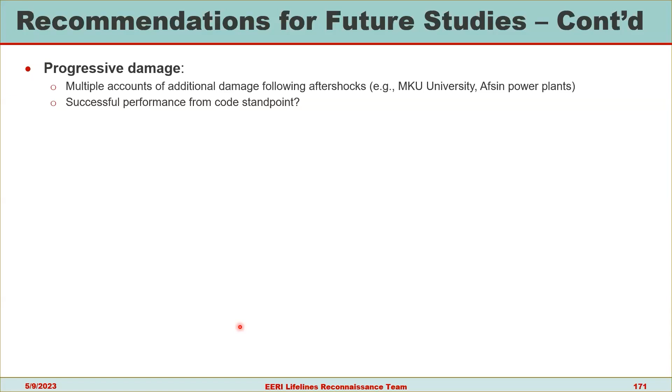It will be interesting to correlate the performance of lifeline structures and equipment with evolving standards requirements—looking, for example, at when these structures and equipment were constructed and installed, the local ground motion, the soil stratigraphy and geology, and trying to understand if the improvements we are implementing in the code are really efficient and effective.

Last but not least, the buried infrastructure got hit pretty hard, and local utilities are still discovering damage, so the complete tally of damage is still unknown in some cities. It would be very important to keep documenting the damage as it is discovered and document the restoring activities.

I'm going to end this section with a few last thoughts. You've heard from Eduardo and Elizabeth. The joint EERI report is available online, so look out for section 7 on lifelines.